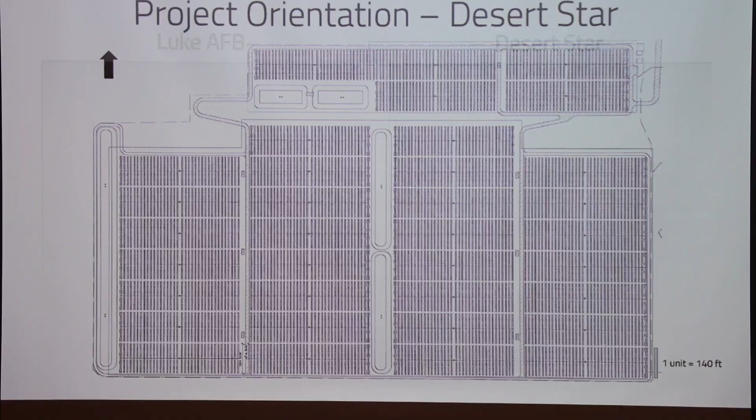I'm going to talk a little bit about an investigation we did, and I'm not going to spend a lot of time on that. I'm going to concentrate on some issues of repair we had to do to these arrays. That included doing a series of coupler tests—I'll explain what these couplers are—and then summarize what we ended up having to do.

Boy, that was unusual. How did that happen? Apologize, my system is having a conniption here.

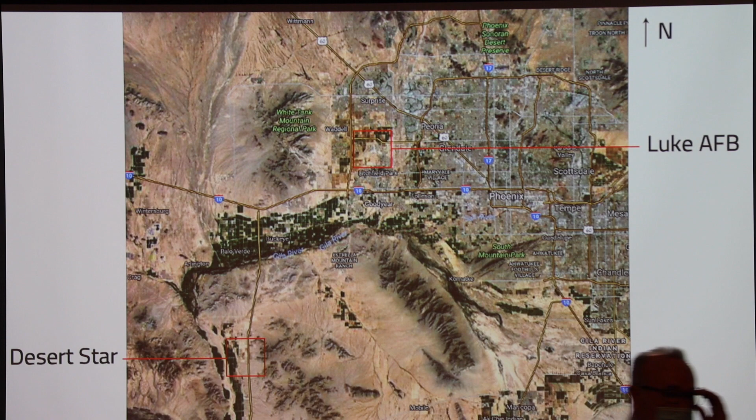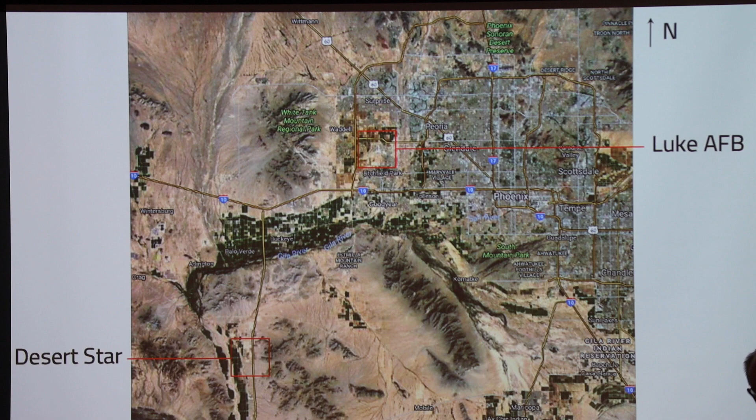Okay, so these are 50 megawatt facilities located in the Phoenix area. One is Luke Air Force Base, and the other is Desert Star. There was a wind event that occurred and caused a lot of damage, but it only occurred at Desert Star. It was kind of a microburst climate wind event. The Luke Air Force Base, though it's the same system, identical, did not experience any damage.

Warranty and guarantee that this would be serviceable for so many days a year, and every day it's not putting power out to the grid was in essence a liquidated damage, like you would have in a new construction project. So they were going to have to pay Arizona Public Service for every day that it was out of use.

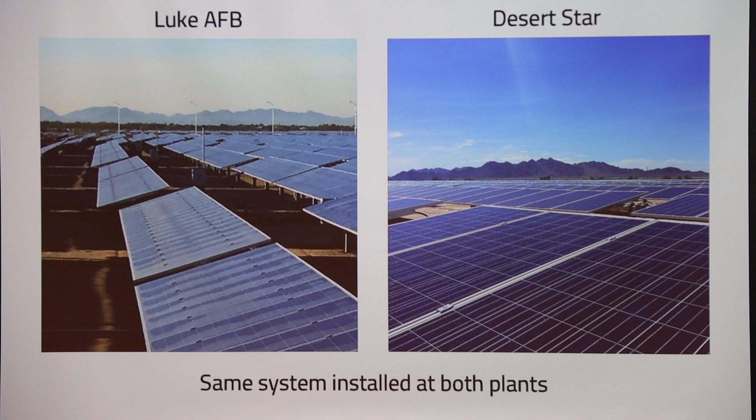So obviously that became important. After the event, the thing shut down, and not only were we having to deal with the support system, but other people had to deal with the issues with the electricity generation. It's always kind of funny to say that, but they had to get everything back online in order to be functional.

So this is Luke Air Force Base, the coupler, and again Desert Star. This coupler that joins this torque tube is the same one at both facilities, exactly the same, essentially the same number of panels.

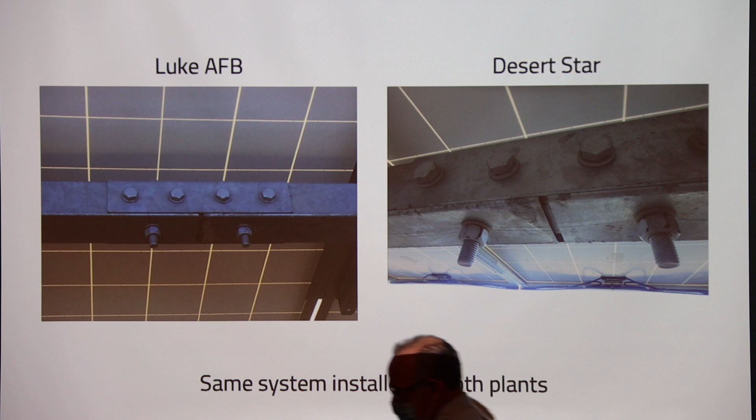This is Desert Star. You can see when you look at it in broad scope here, lots of panels, something like thousands of panels. That's all I can remember at this point, but there are lots of panels.

Each one of these represents a given array that we were looking at, torque tube, and so you can see it covers quite a bit of area in the desert.

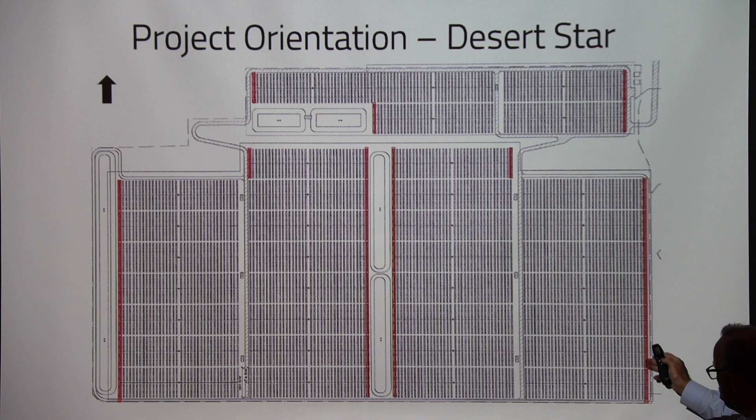In terms of the design, there's a bit of a difference for the ones on what we call the exterior exposures. In ASCE 7, when you look at wind, they have different ways to look at the wind pressures that develop. If it's exterior exposed, imagine if wind is coming this way, it can create turbulence off this one, but there's nothing outside here that would create that turbulence. So this has to generally be designed for higher pressures. The rest of these are generally designed for a little bit lower pressure.

Here's a given array of field, and when we look at this, you can see this would be kind of a shot of that area from the previous image, again the exterior array, and then these interior arrays.

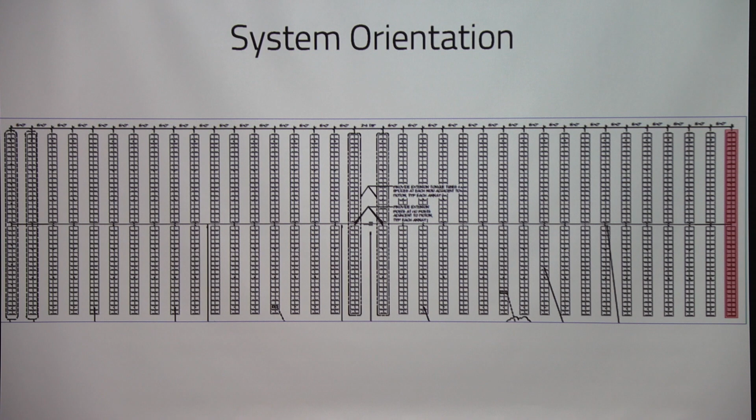And then focus in more. This is a given system orientation. Here's the exterior row on the upper location here, and here is the interior row there. Again, you can see the support system, and here's the drivetrain that moves these arrays on the torque tube tracker system.

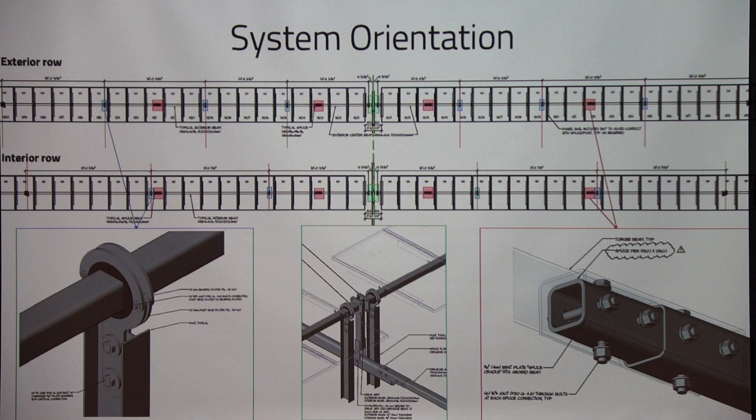I have no idea why this. Did I bypass anything? Maybe not.

Well, I'm going to go to the old-fashioned system here. I'm not sure why it's not working, but anyway, let's continue moving on. Couple shots.

So here's again the solar panels. These are the purlins that attach to the torque tube. You can see the driveline and these coupler devices, and we'll talk at some length about those.

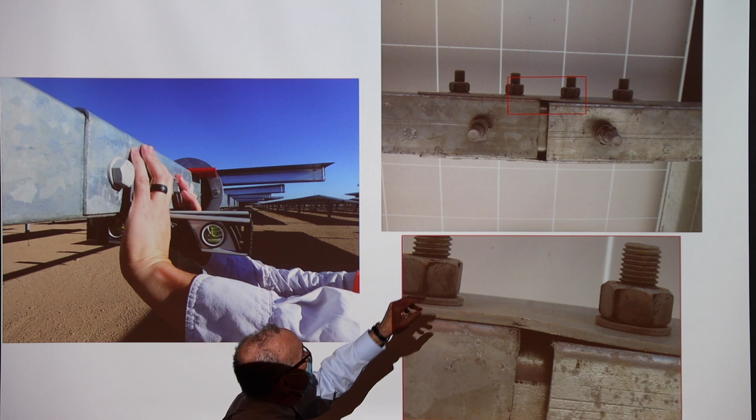So when we went out to the site, looking around trying to figure out what happened, we went to areas where we could, particularly at these couplers — we honed in on those very quickly. You can see some relative distortion between one side of the torque coupler and the other side. And this coupler, you can see here underneath, is ever so slightly distorted.

It's actually a U-shaped piece. There's an interior tube that you can see there that fits into the HSS tube. And this is a little bit closer shot of the distortion that was occurring.

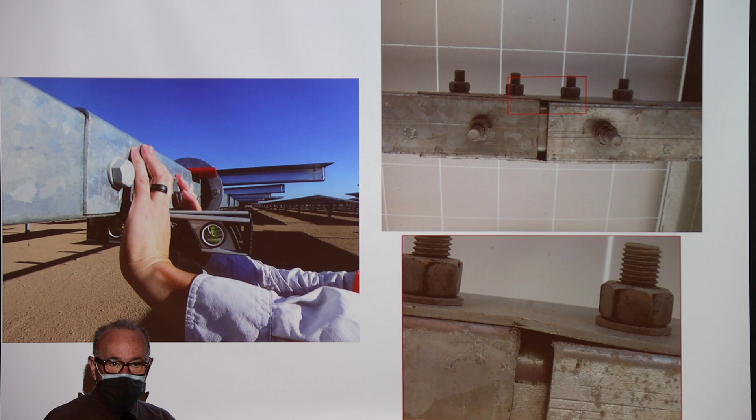And of course you think, well, this was designed for 110 miles per hour, and the wind event, the best records we had from a nearby weather station said at best the wind was probably only in the range of about 45 miles per hour. So didn't seem to compute why would we have this much distress when it was, in theory, designed for 110 miles per hour.

So again, just kind of gives a visual, and we'll look at some statistics on a frequency diagram on where a lot of these panels in the various arrays were releasing or distorted.

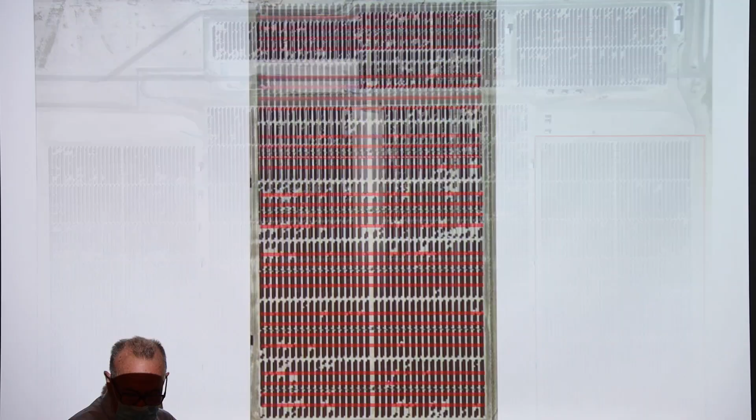So a lot of, you could draw, these are the conditions for the support for the exterior rows. And you can see when we go in and start plotting out, we did it initially when we went out there, we had a pretty small sample for our first site visit. And then the contractor got a drone and did a survey, and we could start counting up.

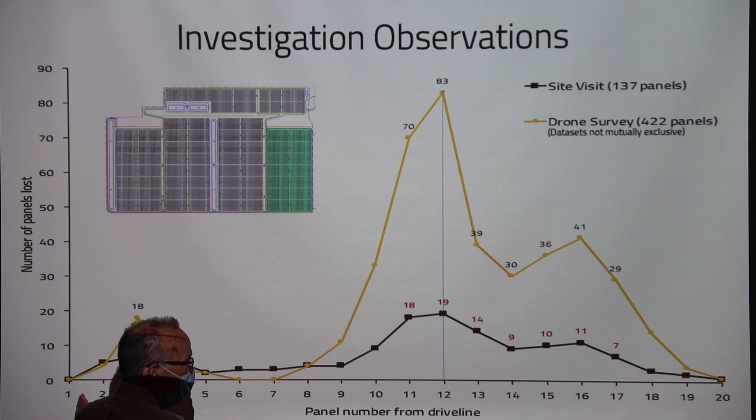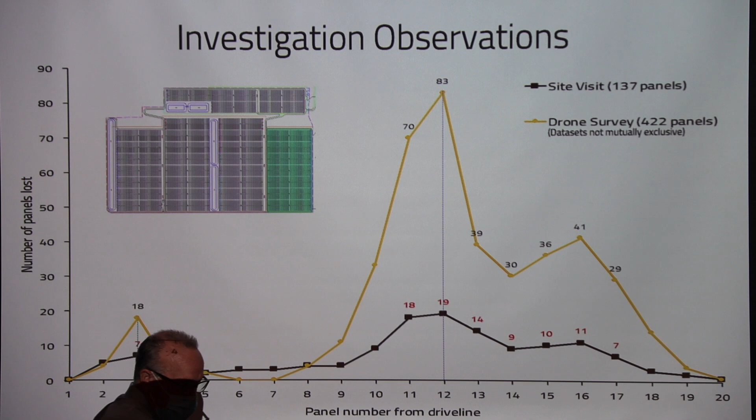And what we found is that in terms of the frequency, most of them tended to happen - there are 20 solar panels per array. A lot of them were occurring right at this location number 12. You had a little bit of a hump over here at 3, and then of course at the ends there's really no distortion that's occurring. There's no coupler there, so there really wasn't distress. So we see a lot of distress occurring at about the 12th panel from the end.

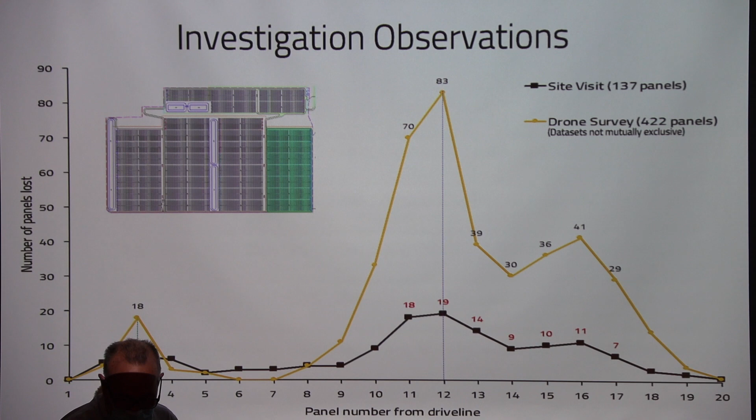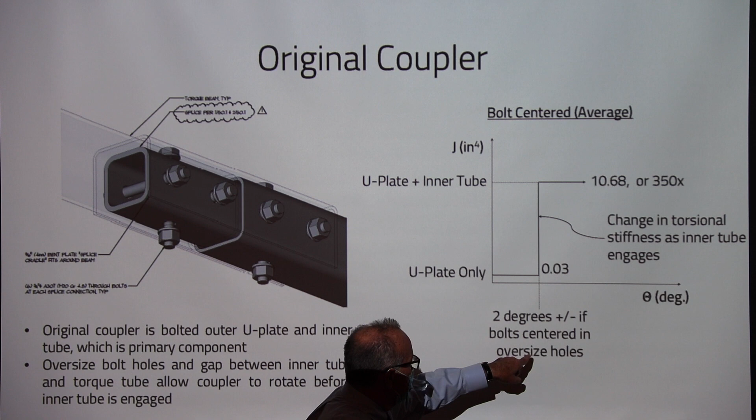Right? It has to go through a certain amount of distortion, rotation specifically, before it's going to engage in this tube. And if you look at just the U-plate itself, it has very, very low stiffness - I mean, very highly flexible. You have to get to 2 degrees plus or minus if the bolts are centered in the oversized holes. And then once you engage it, then that stiffness, of course, goes up.

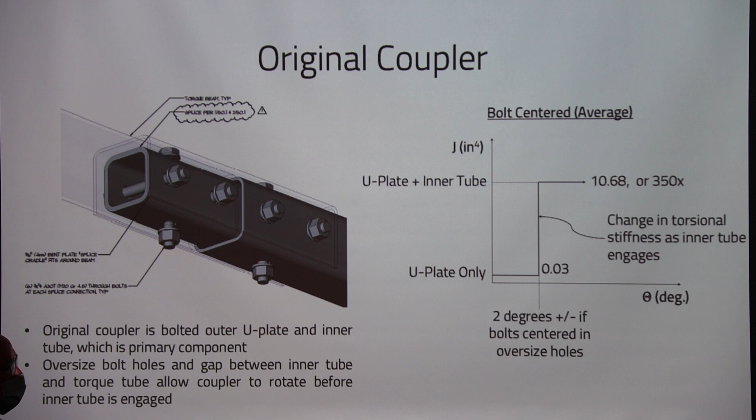That's all fine and good, but it's like, well, why was this designed that way? And then secondly, would you want to rely on kind of distortion and movement in order to have a device function? So again, you can notice the distortion that was occurring, and we could go to all the couplers out there, and we would typically have seen this distortion in that outer U plate. As that wanted to rotate and move, it deformed laterally, and we'll see what happens in actual application.

The panels at the splice - we could go out and measure the slope. You can see this particular panel here, you can see some evidence of how it's kind of racked. The frame itself - you can see here this looks higher here and lower over at this location. And even in the same panel, you would have different rotations or different angles that occurred.

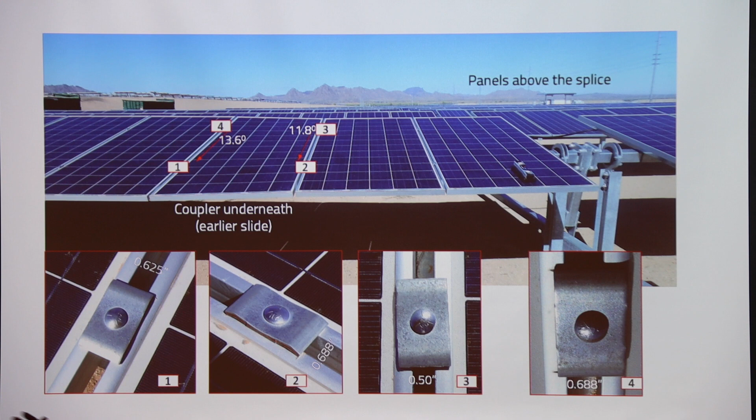The stow position for these panels originally, of course we'll talk a little bit about the wind, but it was originally designed to be at 30 degrees, and then it was later changed to be only 15 degrees. So that would be, in a wind event, it would go to the stow position in order to weather, so to speak, the wind event if the winds got over a threshold value.

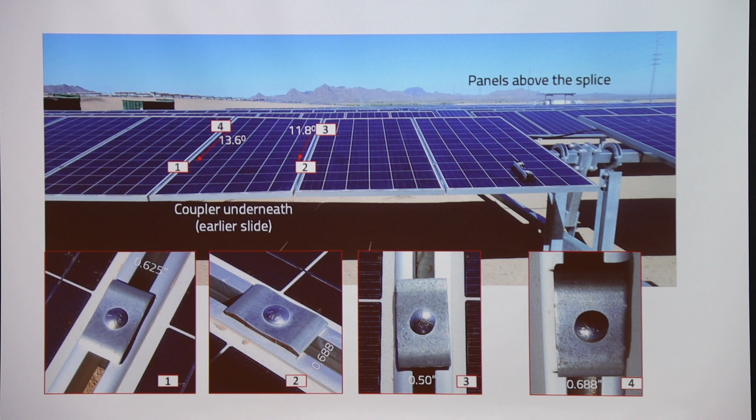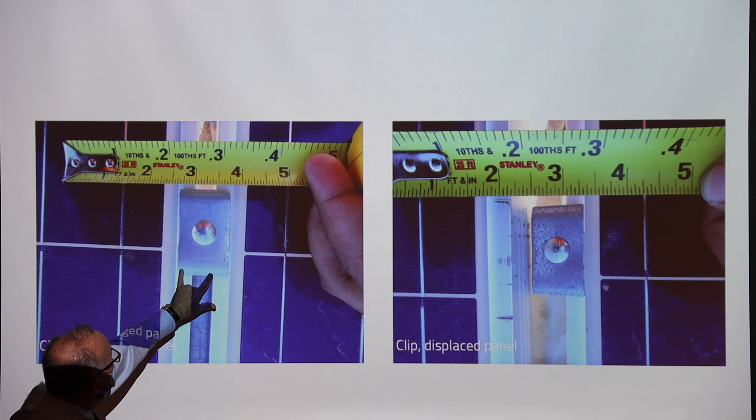The connection - there's just these clips between the solar panels here, this little clip here, and honestly, in my mind, not a very good positive connection, because it's really relying on friction. This one's okay, you get equal sides, it's being held in place by the clip. But over here you can see the movement of this clip, and once this clip moves off the frame of the solar panel, that's it - it releases. And so once you release it on this side, you're probably going to release it on the other side, which releases it on the next side, and so forth.

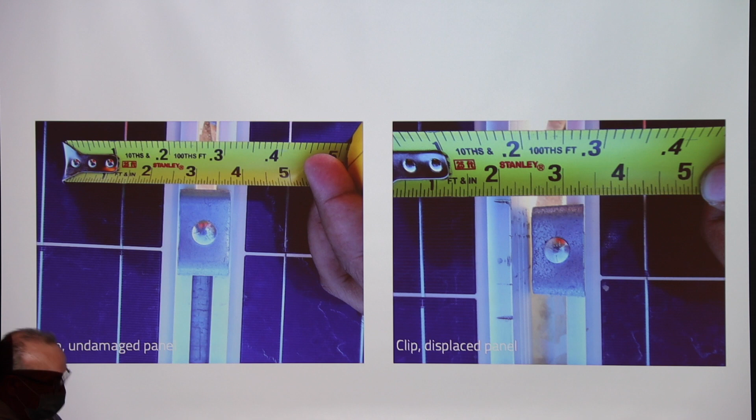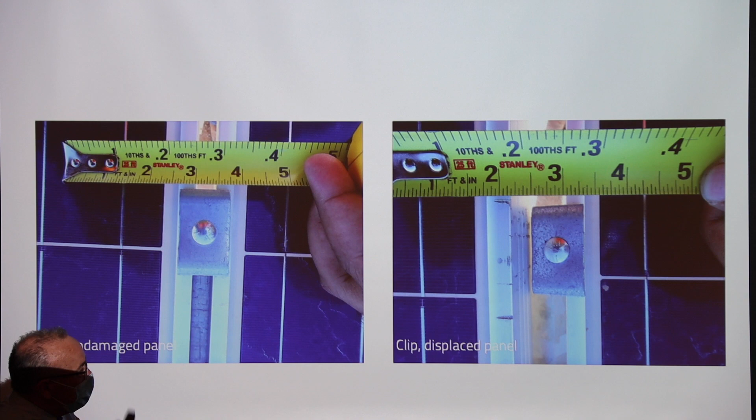So it ends up being a kind of propagating failure, if you will, in terms of holding down the panels. Not the best connection. You would think they would use screws or something that would be a positive attachment to the panels.

In wind, the pressure developed on the panels is based essentially on the square of the velocity of the wind speed. This was designed for 110, and yet the wind speed was only a mean average of about 40 miles per hour that created all this damage, so way below whatever pressure it was presumably designed for.

Clearly there was something wrong in the design. So the overall failure analysis and investigation—I said we were able to pinpoint that very quickly.

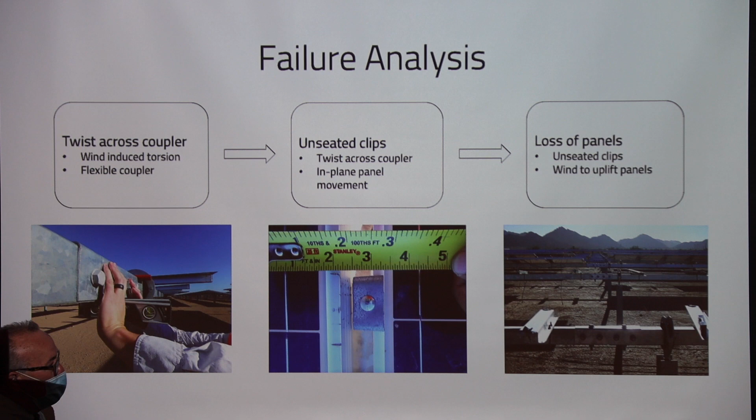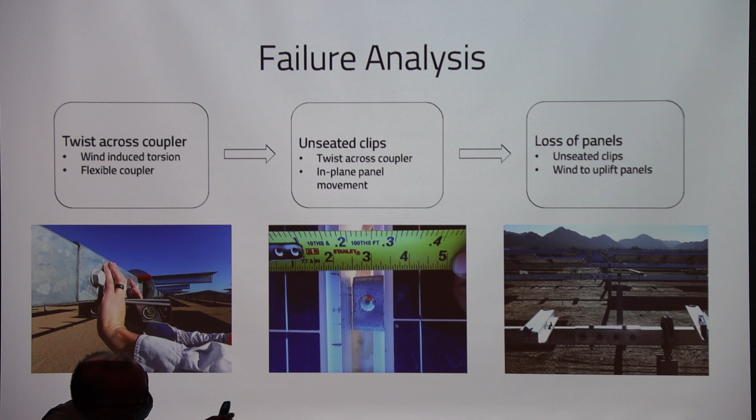You unseated the clips, and once you unseated the clips, you were able to have release of the overall panels, and you can see in the last one the overall loss of panels. It didn't propagate completely through the whole array, but it typically would go through a number of adjacent or contiguous panels as this happened.

That's kind of the investigation side, and I don't want to spend too much time on that. The more interesting part was our client asking what are we going to do about this and how are we going to fix it. By the way, they were paying something like $10,000 a day to keep this plant facility open, so they were in a hurry. The power company was real good, and based on their proactive nature going out and getting this fixed, they didn't worry about the liquidated damages for having the facility down. But we needed to replace the coupler.

That coupler was definitely the issue. If you have a torque tube as a continuous member, but you put a splice right in the middle of it, you've got to have a connection that can transmit and take that torque as if it were a solid torque tube. I mean, it's obvious.

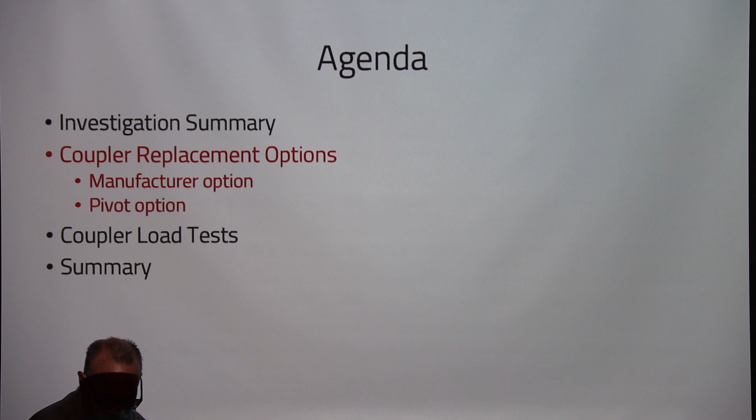So we looked at a couple of different options. The manufacturer of the system had that original one. Since then, they obviously had issues at other facilities because they came up with a retrofit option, which suggests something was wrong. Then we developed our own option, and we did a number of load tests, and I'll finish up with the summary.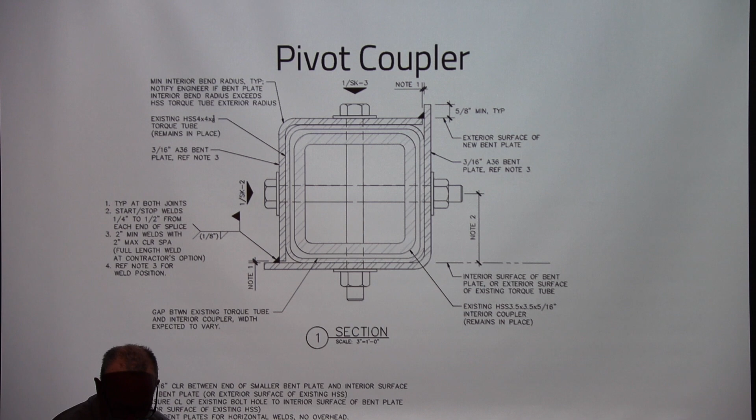This was our pivot coupler. We developed bent plates that we ended up bolting through with bolts like in the original connection, and then we also welded at this location and this location. We felt this was going to be closest to what an integral torque tube would be in terms of overall torsional stiffness, with some stitch welding in between, as you can see in elevation, and then those bolts.

So for the load test—our clients, and it was really with the client or the contractor who built this, decided early on that they wanted whatever coupler was going to be most like whatever the stiffness of the torque tube was. That's what they wanted to replace it with. Seemed perfectly reasonable.

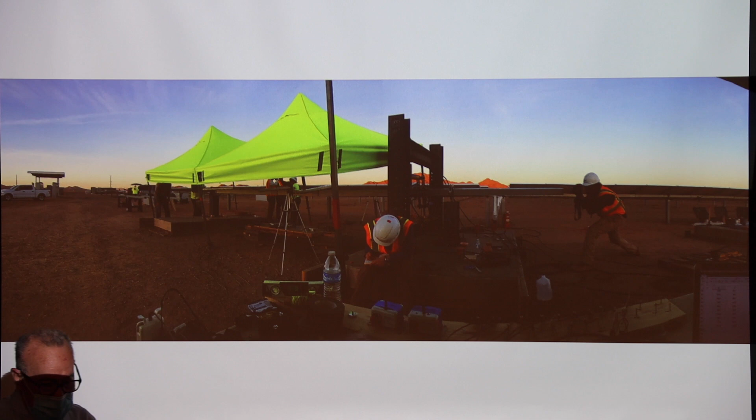We thought about disassembling some units, sending them to a laboratory for testing, or the other idea—the contractor actually said, why don't we just build and do the load test out at the facility. So we quickly built it: they gave specifications for a foundation and some sections we could bolt off of, disassembled some of the torque tubes, went out into the desert—I guess it was probably July doing this work, so you can imagine how hot it was.

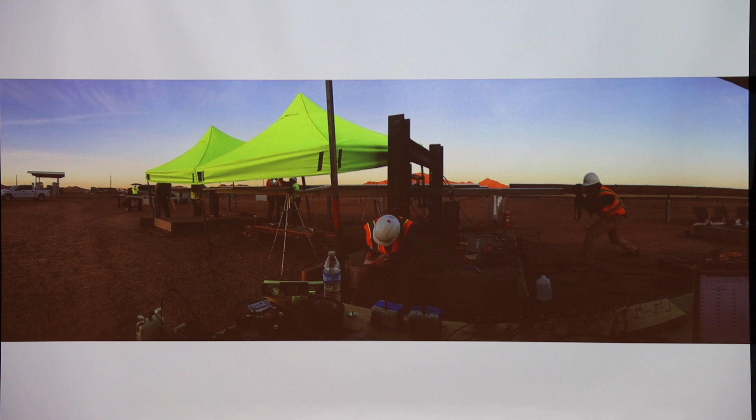We ran a series of tests out in the field that included flexural test and torsion test. It took 6 days to run 6 different tests. We had 3 different test configurations, which I'll describe.

Again, we didn't have any issues with Luke Air Force Base, but the same problem - if they ever had a similar wind event, it was going to have the same issues. So it was clear the couplers just did not have the torsional stiffness they needed, and they needed to be replaced. There were almost 1,600 couplers between the 2 facilities that had to be worked on.

Welding is not necessarily the option you would think of, but it was the only way we could really come up with mimicking what that torque tube needed at that coupled location.

So we had these different couplers - the original coupler we tested as a benchmark, the manufacturer replacement coupler, and then our pivot coupler. We used the same protocol on sections of the torque tube: a flexure test, a torsion test, and a combination of flexure and torsion.

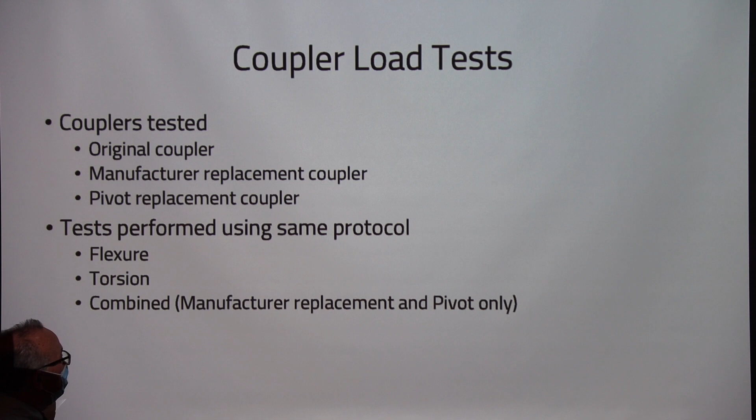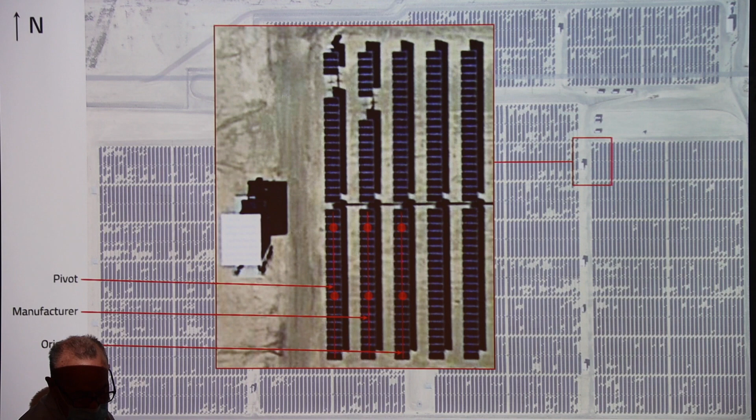So we went out - these are all interior sections, remember exterior were the far ones on the leading edge of where a wind event could happen. We went to an interior section and disassembled 3 different arrays and took a portion out of it, including the support condition and the link for the coupler, in order to do our test.

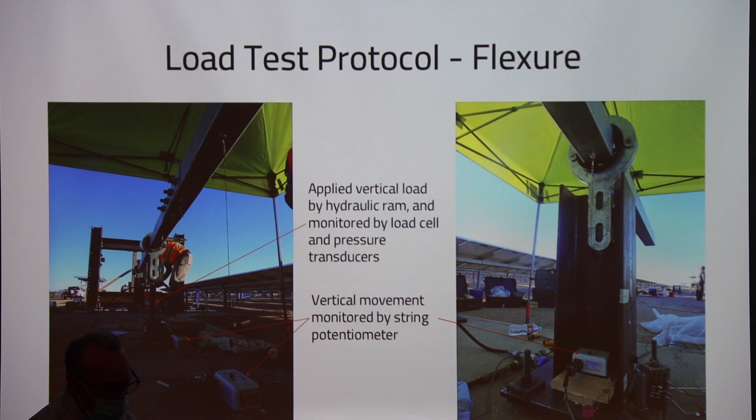We applied the vertical loads by hydraulic rams and monitored the movement through potentiometers, string pots basically, in order to be able to develop load displacement curves and thus derive the flexural stiffness.

The load test protocol for the torsion was similar, but we were doing it with torsion. We'd rack it one direction and back the other direction. The difference here is we have a support with the torsional restraint, and then at the other end you apply torsion.

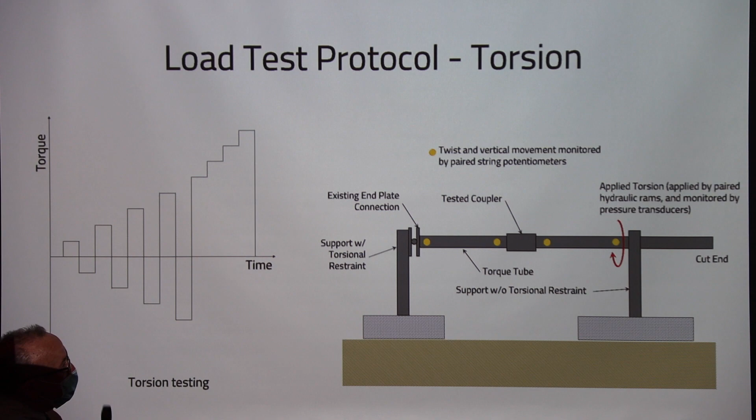So here's again the setup on the left-hand side. On the right-hand side is the applied torsion test, and you can see this little cantilever section off here with the ram on one end and the other end, and so you can imagine as we engage the hydraulics, it puts the torque into that tube.

So we're monitoring the twist and monitoring the movement, or in this case the rotation, through a series of potentiometers.

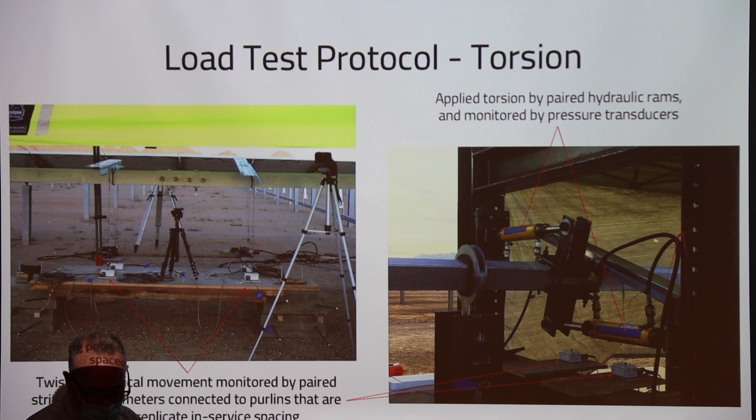Having some limitations, not being in a lab, we had to decide what was the end game or the end point of those tests. It could be a structural failure - something happens and it explodes. We exhausted our brakes, we exhausted the stroke of the rams that we had, or there was, of course, any safety concerns we would immediately stop the test. So those were the 3 hard points that we had in terms of our protocol.

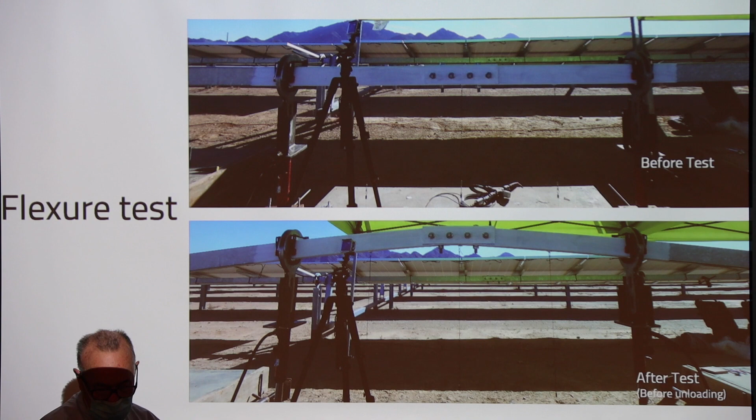So first, we went in and looked at the original coupler. We did both - this is before the test, and then you can see after the test, it really is acting like two rigid bodies almost. There's very little bending in that section - essentially the coupler is just moving up, and you've got two straight lines more or less. Even though there's not necessarily a lot of bending in these connections, the real critical point is going to be how it's going to behave in the torsion test.

So if we look at the theoretical flexural stiffness compared to the load deflection curve, you can see for the original coupler, it's okay for a very low level of load, but then it drifts considerably off from where it should be theoretically, from a stiffness perspective.

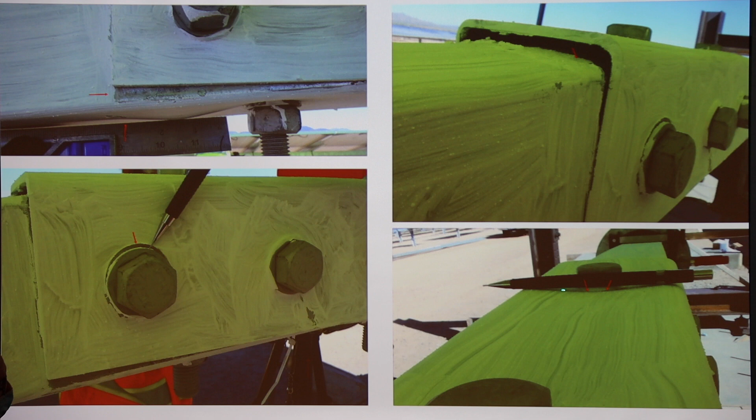Some shots of what you would see underneath here. You can see some of the deformation occurring at this bolted connection, almost dishing in. We had some slip around some of the washers. You can see the amount of space between this U-shaped piece and the torque tube itself, and on the top side, that dishing, distortion, and deformation occurring around the bolts.

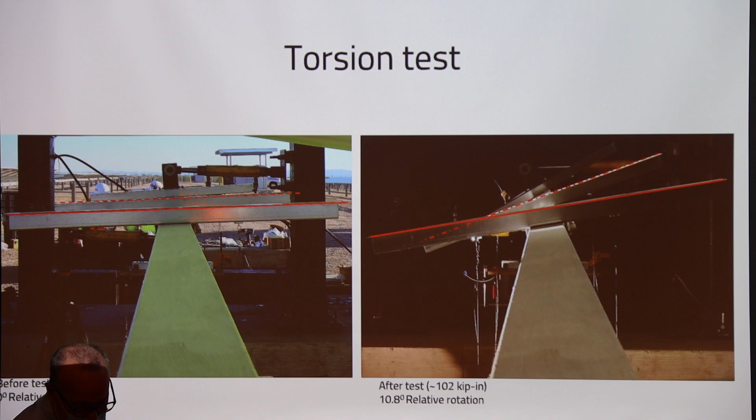In the torsion test, before the test we set the purlins out level to each other, so we had a zero point. After the test you can see some of the rotation that has occurred from one side to the other at the purlin, a fair bit of rotation. When you look at that overall load or torsion deformation rotation curve, this would be the theoretical calculation of the stiffness of the torque tube, and you can see how it's actually behaving.

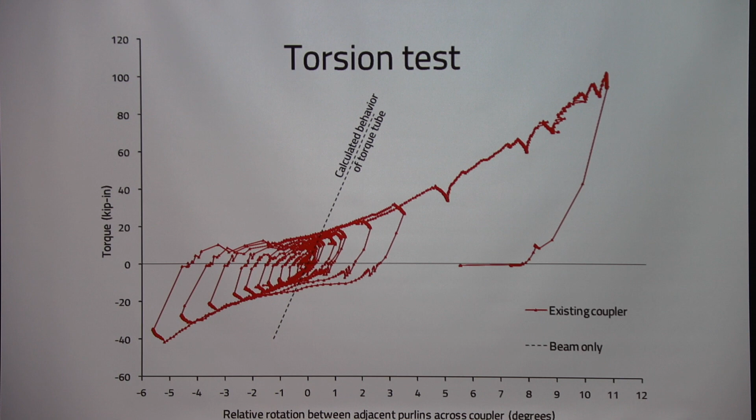Just to give you a closer shot of that torsion test, we go in here and clip it out. Again you can see this would be the theoretical torsional stiffness, and this is how it's actually behaving. We're rotating it through with the hydraulic rams one way and then back the other way, that's why there's what looks almost like a hysteresis loop in that connection.

So again, some of the looks underneath there, you've got distortion at this location. You think about this, it's like you have a tube here and you've got a cut there. You do have the internal tube, but think about torsional stiffness, the difference between a solid section and a U section. Calculate the torsional stiffness of that, it's significantly lower than what you'd have with a solid tube.

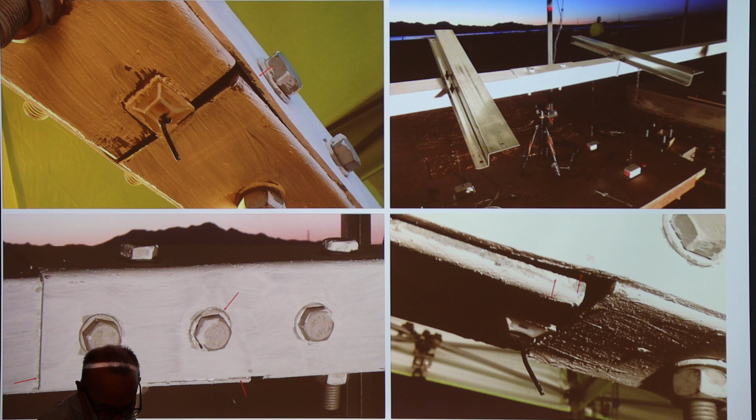Again, we can see some slips at the washers. You can see things happening at the coupler between each side of the torque tube, and some permanent distortion, a relative rotation occurring on each side of the torque tube in the purlins. Again, distortion, you can see movement of the washers and the bolts, and the distortion at that location.

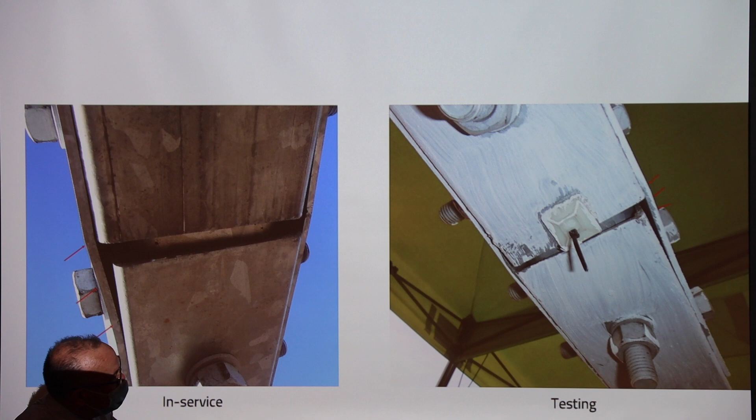So this is in service, that's after testing. We were comfortable that we nailed what was happening in the field, what happened during that wind event, and we were able to demonstrate that through the testing of the original coupler out at the site.

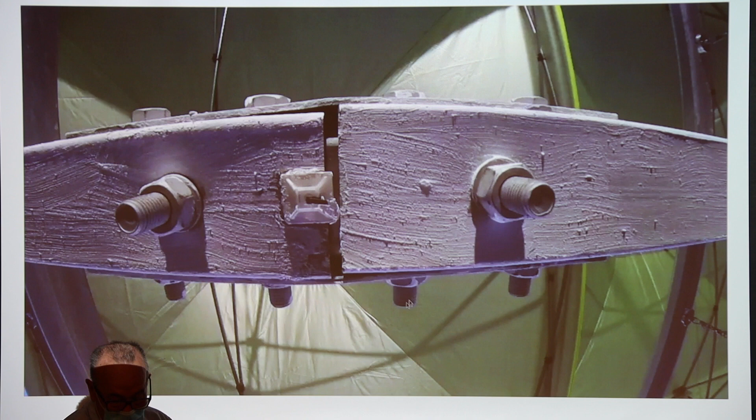So it's great that we can put a GoPro camera on everything and take a look at it, just start videotaping anything and everything, and you can see what's happening in terms of the distortion.

When discussing this with the engineer of record who designed this, he said, well, we designed this as a fuse. I said, well, what do you mean a fuse? This is just, you couldn't even, it's distorting. You've got these panels going off. That is not a serviceable structure. You're losing 25% of your panels at a 40 mile per hour wind speed. That's not a serviceable structure. It's got to be fit for its intended use, as we say.

So if you look at it, there was interestingly a little bit of difference in when you have 18 kip-inches of torque in each direction. There was a little bit of difference in angle in terms of the rotation.

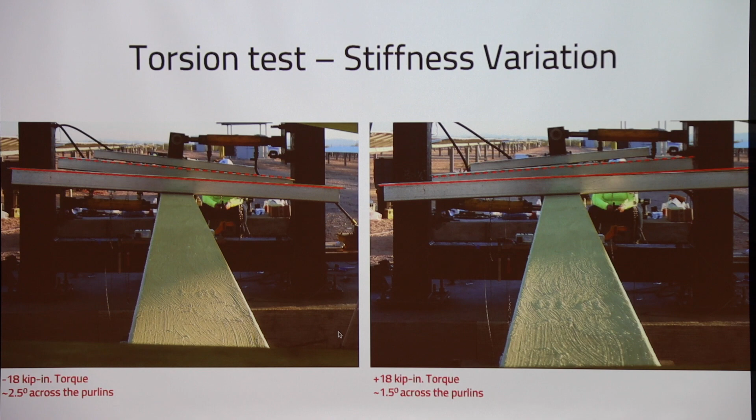In this case, only 2.5 degrees across the purlins, and this only 1.5 degrees. So just a little bit of asymmetry, if you will, between the two sides.

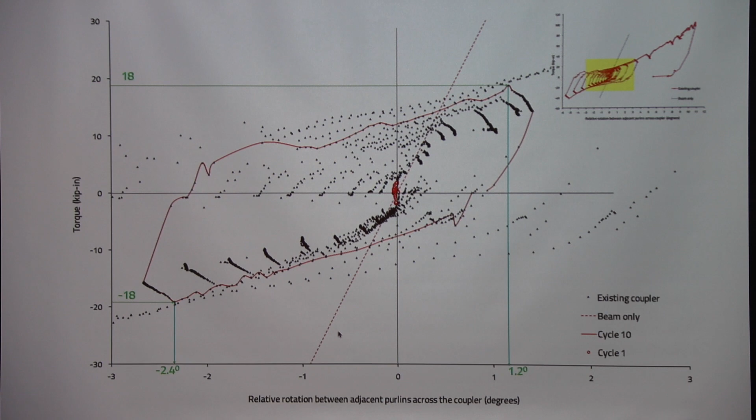So now when we again look at the relative rotation of adjacent purlins across the coupler, you can see that we're getting a lot of rotation, very non-linear rotation as you increase the amount of load.

So next we went to the manufacturer's coupler. After all, he was going to be offering those couplers for free, and he wasn't going to do the work to put them in. But we told our client, it may work. We're not convinced, and so we tested the replacement coupler as well.

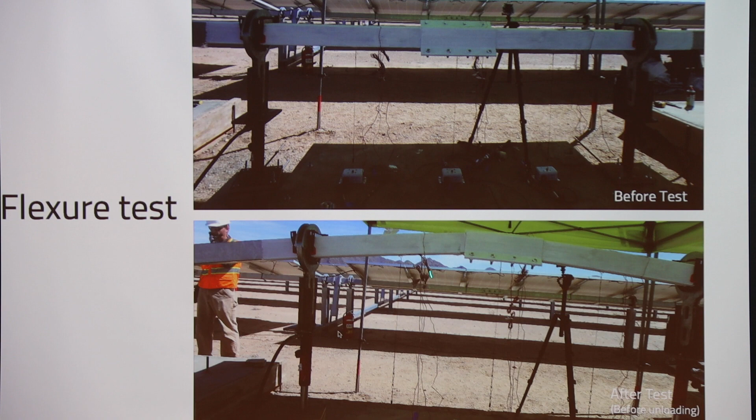So again, we repeated the test, went through the flexural test, and again, when you look at the flexure test with this clamshell here, it behaves almost like it's just a stick, rigid body on each side. All the action is occurring at this coupler in a flexure test.

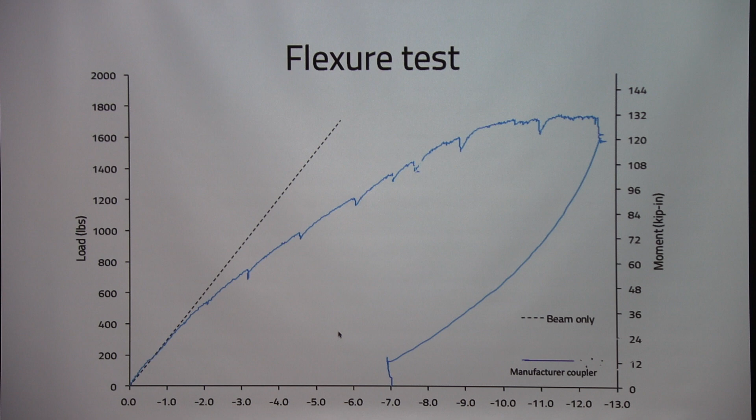It did perform a little bit better in terms of its overall stiffness. If this is the theoretical flexural stiffness, we're closer to that line, but we're still not there. So there was still some inherent lack of flexural stiffness in that connection.

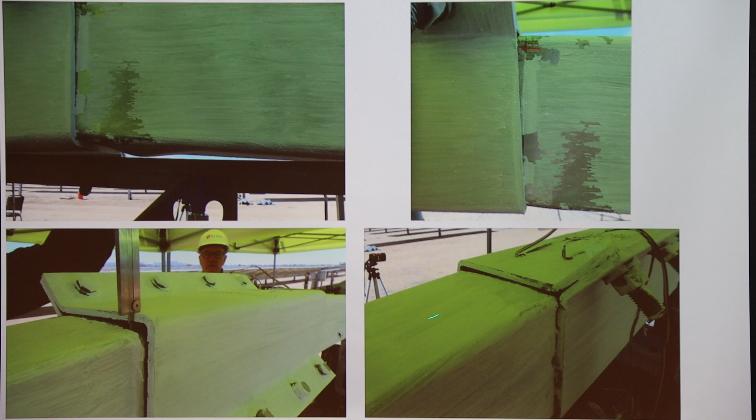You can see our favorite whitewash, seeing what's happening at each side of the connection, seeing what's occurring out near the bolts as well.

And of course, if you really wanted to know how this was going to behave at 110 mile an hour wind, you'd go run a wind tunnel test, right? Well, we didn't have the luxury of really doing that.

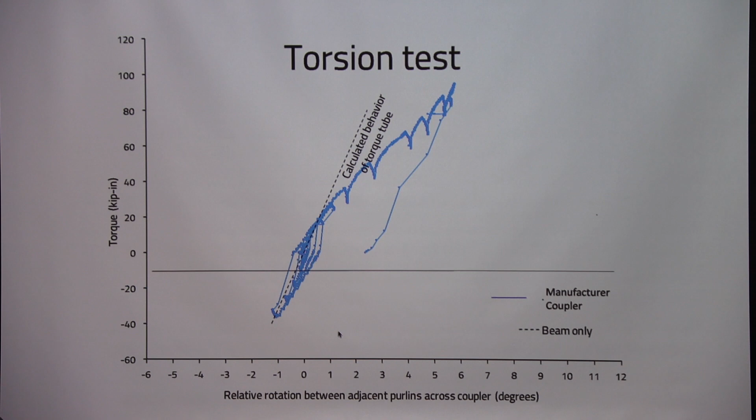So our thinking was, and what we conveyed to our client, was: the best approach was to look at their design calculation, and it was clear they assumed that if able to take that whole torque across that member as a solid tube, the stresses are fine. So in our mind, we said we've got to mimic what needs to be done in a solid torque tube as if it had no coupler.

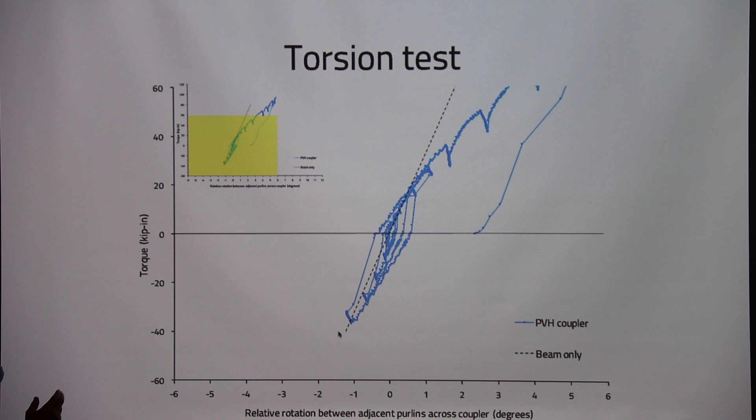So the torsion test, again, when we did a little bit of a snapshot, you can see it goes off—it's linear at first, and then we deviate from the theoretical straight line.

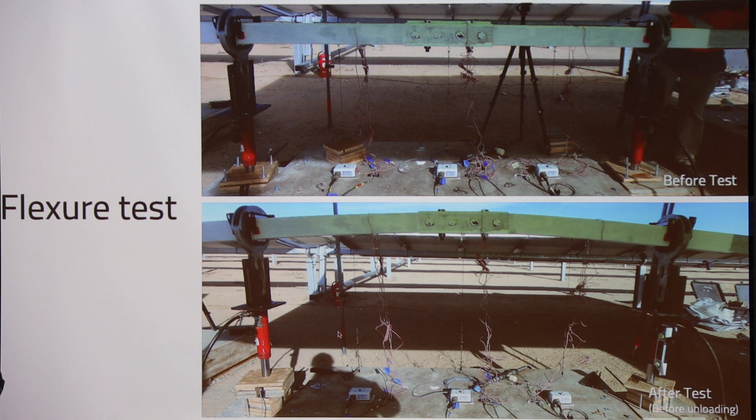So finally, we're getting back to looking at the replacement coupler that PVH designed. We ran the test. Again, in the flexure test, in any type of connection, you can see a little bit more natural curvature in the beam with this connection than we saw on the other ones. Still not absolutely perfect, but as close as you're going to get.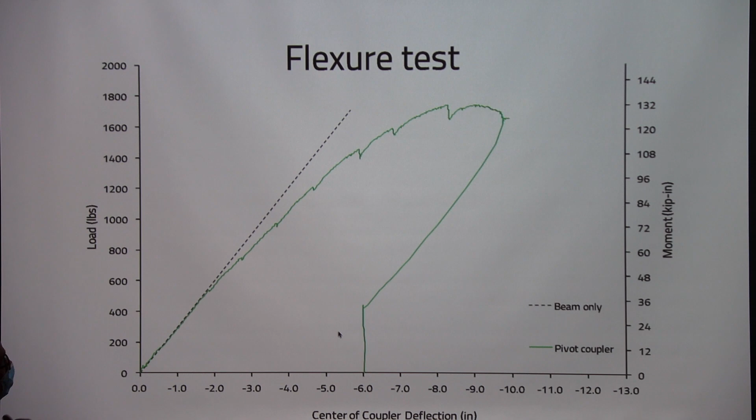And then when we run the flexure test for this, you can see we're getting pretty close to the line. Again, better than the other two, but still not absolutely perfect.

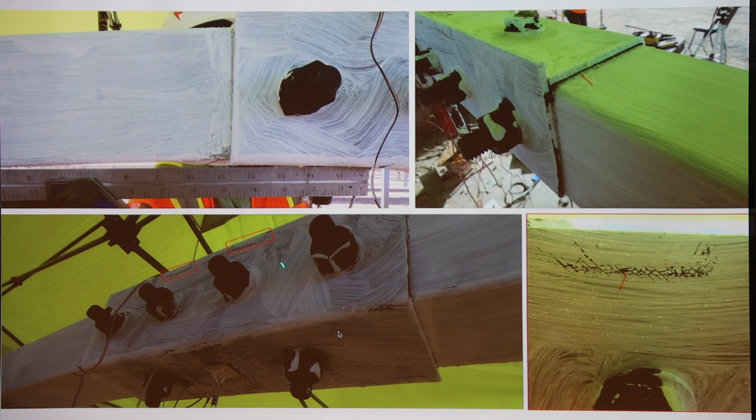Here's just some shots showing some of the damage. We get a little bit of localized yielding here, at locations. You can see a little bit of separation between this new bent steel plate that we added as our coupler and the torque tube. So a little bit of separation there.

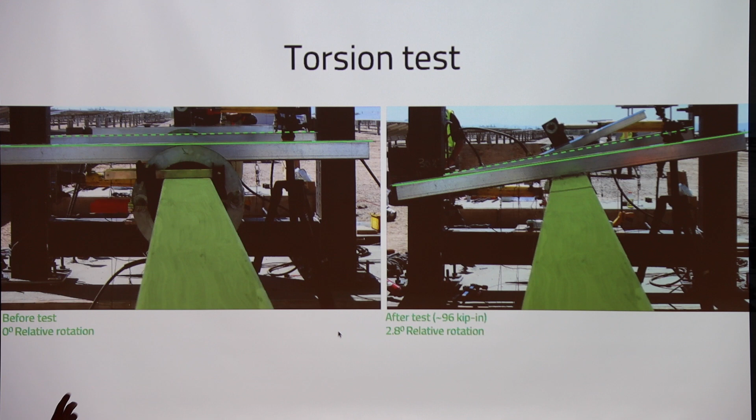In the torsion test, you can see the relative rotation is much less than what we would expect between adjacent purlins. So before the test they were level. After the test we had that smaller amount of relative rotation.

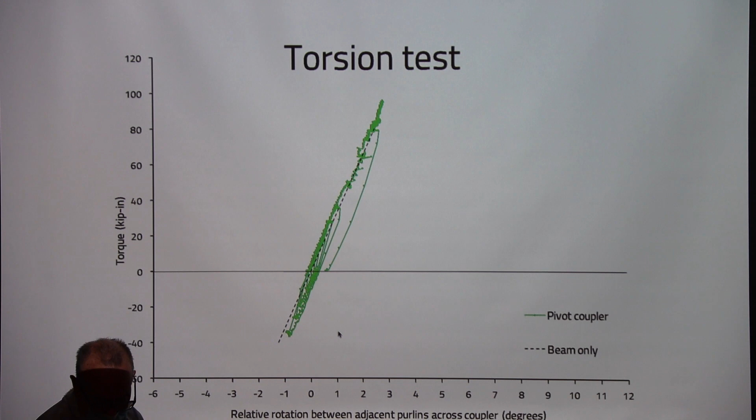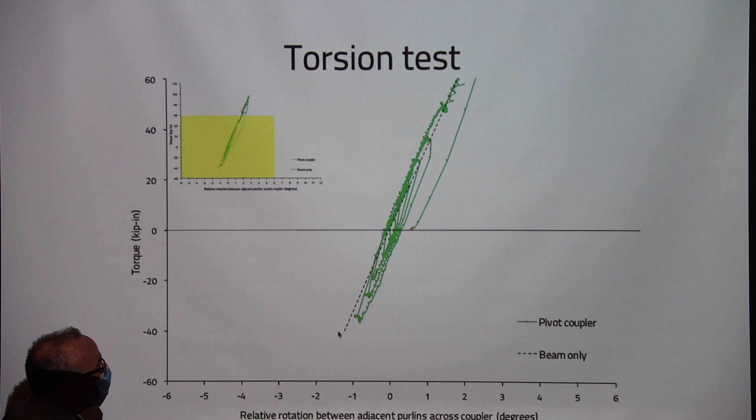And when we look at that particular behavior, this is the theoretical line I've been plotting for the torsional stiffness, if you will, and you can see that we're getting pretty close to mimicking what we needed for that torque tube. And again, that's a close-up shot of the torsion rotation, and a very good, very close comparison between the lines.

So if we compare all those, I got accused by the engineer of record when we made a presentation that green, blue, and red were significant. Red was their original coupler, blue was their next coupler, and green is our coupler. He said, 'You're biasing what you're presenting because you're showing it as stop and go.' I said, 'No, we really did not think about what colors we use for plotting these curves.' We had no concept about that.

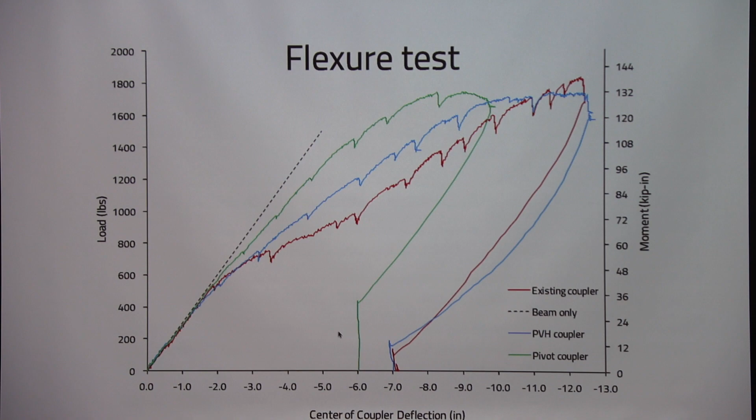But I think you get an appreciation when you put them all together in the flexure test. The original coupler, their replacement coupler, and then the pivot coupler, we're getting closer and closer to the theoretical stiffness.

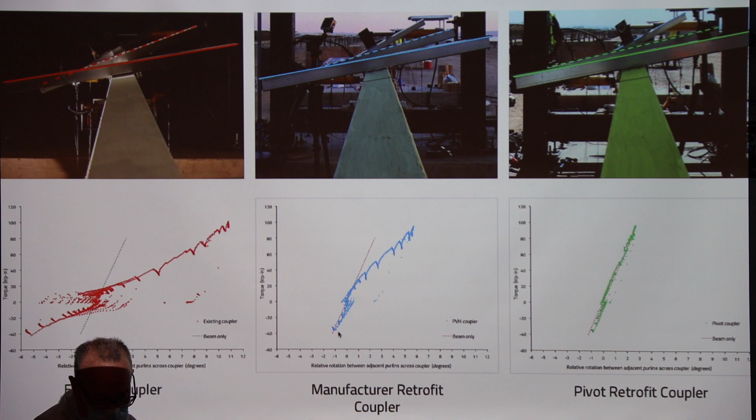Same thing when you look at the torsion test, you can get a sense that's really where all the action was occurring, in torsion on this member. Very far off on the original one, a little bit better with their replacement, but very close with the retrofit option we came up with. Again, if we zoom in on that compared to the theoretical torsional stiffness, you can see we have pretty good agreement in that particular case.

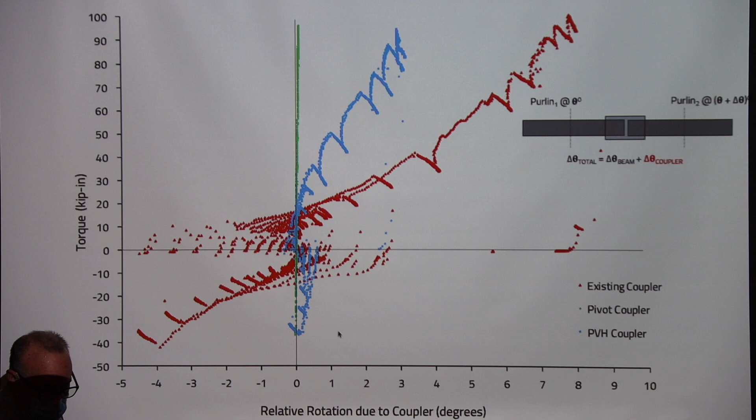The purlins, you look at the overall rotation. You have to look at the rotation of the beam and the rotation of the coupler, and we had enough string pots and whatever that we could determine what was happening on each side of the coupler.

There was just a lot of distortion occurring locally at the coupler, and you could see that we were able to compare what happened in the field with what we observed in the load test. The pivot and the manufacturer replacement couplers were both stiffer, but the pivot one was much stiffer, though stiffer than the replacement one.

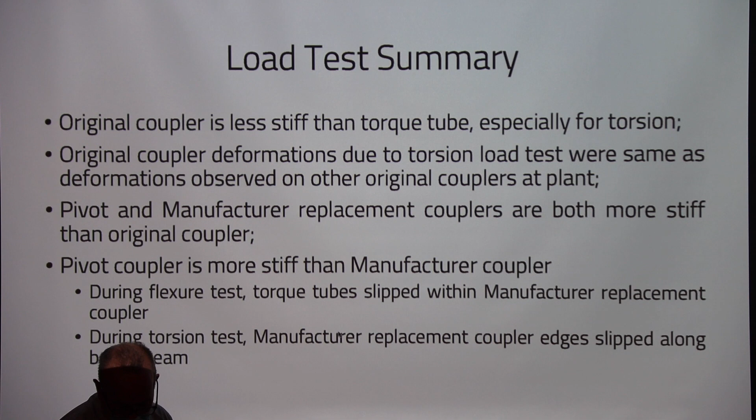What ultimately decided it was the authority that owned the facility had their own independent engineer come out, and he witnessed the test. He was very adamant that the only way the power authority was going to accept it was if they used the pivot coupler, albeit it was going to be a fair bit more expensive.

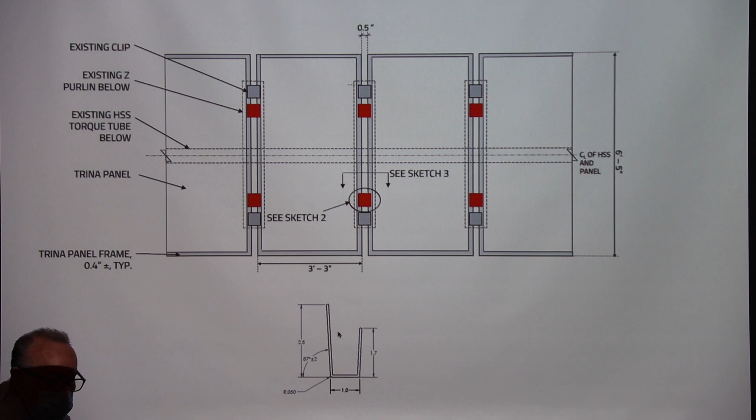We did a replacement of those clips. You may remember that one of the contractor's folks who builds these things came up with this little idea of having this push-through down here to keep them separated, and it actually worked quite well.

So in summary, we had one field that was extensively damaged. We had another field that was not damaged at all, but they had the same system, designed for the same 110 miles per hour. So it's like, okay, what do you do? Well, the only thing the contractor could do is say we're going to replace all the couplers. That was, again, about 1,600 couplers that had to be replaced between these two facilities.

The damage and the pattern of damage we saw were very consistent with what we saw in the field from the wind event and what we were able to demonstrate through the testing. The couplers did not have enough torsional stiffness, which resulted in significant relative rotation between the panels, particularly at the coupler. The couplers were replaced, and they were at least more or less consistent with the original torque tube properties.

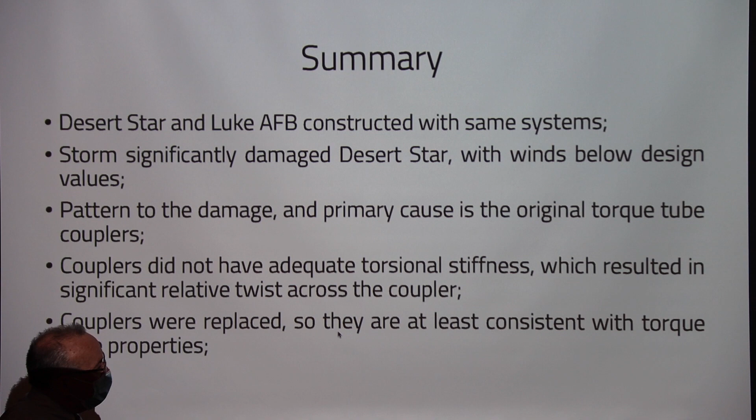We did the load test to verify what the replacement options would be, and again, the one from the manufacturer wasn't quite as stiff, particularly in flexure—very close there but much further off from mimicking the actual torque tube properties compared with that particular retrofit coupler. The original coupler's performance was not consistent with the existing torque tube, and we were able to replicate the damage observed in the field with what we observed in the actual test.